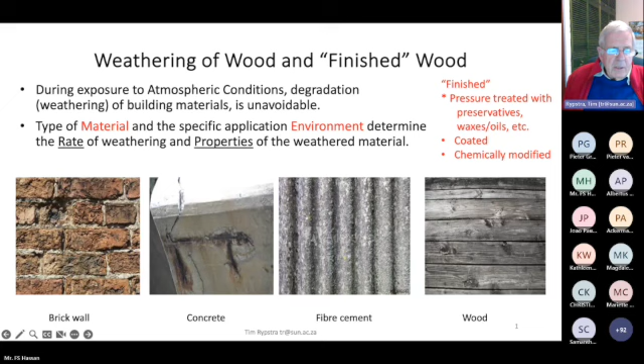Then some examples. Well, we all over centuries know that wood has been used as a construction material in various applications and industries and products, and the function varies extensively. It can be purely structural, right up to purely aesthetic, and anything in between.

And then the question is, under which environments does it happen? There we have the 3 classes of environments. First of all, the atmospheric conditions, which refer to interior applications and exterior, and that's where the weathering, typically the definition of weathering would include that particular environment, then terrestrial or in ground contact, and then aquatic environments, freshwater or marine water.

And the basic question is then, how does finished wood weather? Some of these photos I'm showing here are from South African pine treated with various surface coatings, or some other treatments. They've been exposed at 45 degrees north facing at Stellenbosch. So these are typical weathering phenomena, starting with a piece of untreated, unfinished wood, 1 year more or less under the weather. Deeper checks appear in the heartwood. Further down, the wax-treated wood, in other words wood impregnated with waxes, certain droplets are still remaining behind after 10 years. Penetrating finish, after 2 years, produces an irregular surface texture. It's not to say that every penetrating finish does that. So these are just specific features of weathered wood.

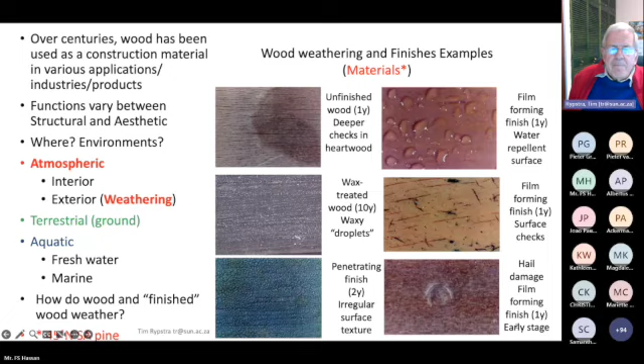Proceeding to a darker accentuated ring, which is indicating some fungal growth there. A little bit later, in another coating, you can see the elliptical pattern is actually discoloration in the wood itself. You'll notice the wood grain doesn't show through these coating systems, because they have certain pigments that prohibit that.

Then flaking and fungal attack on timber. This is a typical film forming coating that peels away or flakes away as a result of the swelling and shrinkage that occurred in that particular part of the sample here.

Just to refer back to the heading at the top, these are the materials we are looking at - wood material being coated or treated, showing certain weathering characteristics.

In this SEM, scanning electron microscope photo, the growth of a mold on top of the surface looks quite rough actually, and normally if you touch it, it would feel very smooth. But this is what can happen depending on the growth conditions for this particular fungus.

A crack in a coating, with spores or mold growth already happening there, finding its way inside the wood. And then on the right hand side, there's a coating system that started flaking, with crow's foot cracks developing, and it disintegrated as a coating.

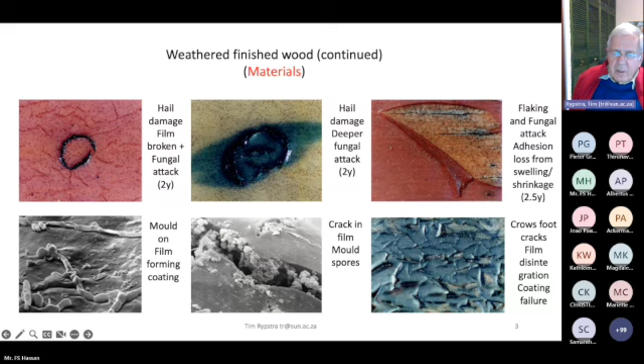Okay, the next slide. If we look at certain products, as soon as you take a material and put it in a product like a door, a window, a gate, or a rail, then you induce certain weathering characteristics in it.

Perhaps it looks bad, but from this you can understand the mechanism of deterioration of certain products. Of course, an insufficiently maintained painted hardwood door - at the top of the white panel, you see these lines which accentuate the joint.

As soon as these become visible, you know there is excessive moisture coming in at that particular point, and also excessive moisture which accumulates at the bottom rail of these fielded panels.

Similarly with the window in the center, at the bottom you will find that the bottom parts of products, because of gravity, are always suffering more than others - water running down, accumulating, especially if there's the possibility of water accumulating at the bottom.

That's where, at the corners, at the joints, you will find water seepage through the coating, and then the whole deterioration - well, it's actually called weathering, but it is part of fungal degradation as well.

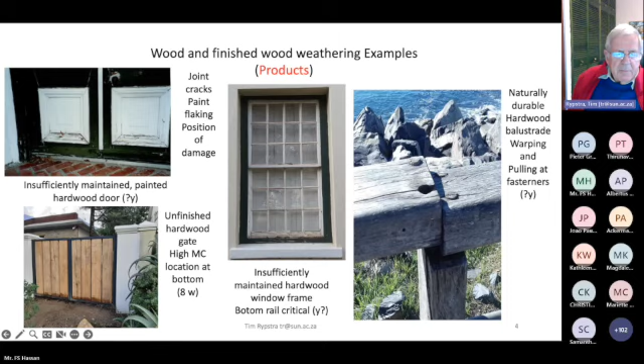Then, not that wood is bad, because that might be the impression - this is a timber deck that was installed for 32 years and CCA treated, H4 level, and it's still in a relatively good condition. Certain pieces of course have to be replaced, but that's the variability of the material, something one has to accept.

The one in the center is another part of that same 32 year old timber deck, where one part was replaced partially, and you can see the difference between the weathered and the slightly weathered wooden decking board, which gives us information about the weathering mechanism. Then another one in the left-hand corner at the bottom, there's a fascia board, and one needs to specify why.

This is actually a very good, excellent piece of study material, although it is not very decorative to put on your roof or keep like that. This is a delaminated and deformed TBTO-lindane treated phenol formaldehyde bonded South African pine fascia board. After 30 years, insufficiently maintained, it shows how delamination occurs as a result of weathering and deformation, with other sections moving out of position.

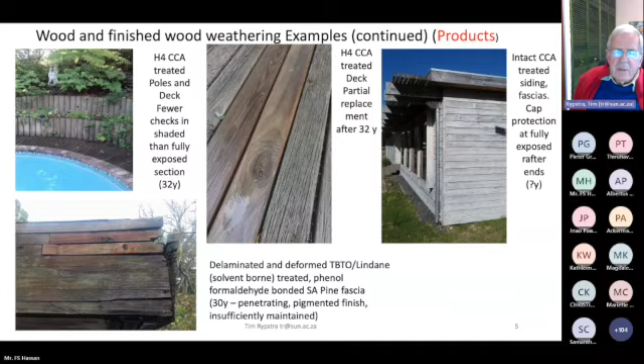A balustrade or a rail on a bridge, naturally durable hardwood. It's been there a couple of years - I couldn't actually determine, but I think it's even more than 10 years. Some cracking already occurs on the flat surfaces at the top, but it's still in very good condition.

It probably needs the maintenance to be improved a little bit more. On the right hand side, a naturally durable hardwood deck board, and we all know that contact with a wet kind of building material like concrete, with wood being in contact with that, has a higher chance of being attacked by fungus because of the increased moisture content levels.

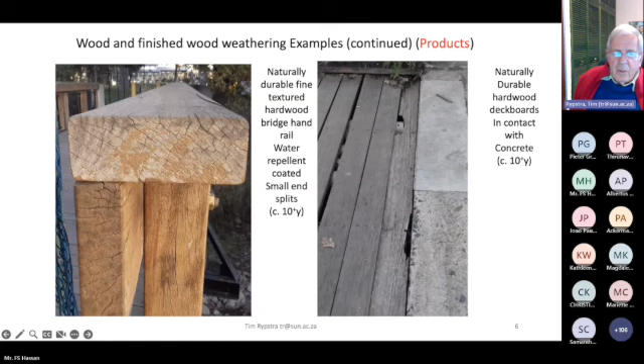So where does it occur? If we have to define it, what is a suitable exterior condition for that? This description, a European use class description, is classified in terms of the moisture content - occasionally more than 20 when it is outside undercover and some wetting can occur, and more frequently above 20 when it's outside above ground with weathering and wetting. The two other terms, limited and prolonged, which are very subjective terms, are included as well.

When does it happen? Does it take 2 months, 3 months, or does it take longer? So how does it weather? In other words, what is in the environment that is causing weathering of woody material or a wooden product? There are quite a few of them.

Insolation, in other words the amount of sunshine received, changes with daily, seasonal, annual variations - what is the day length and what kind of UV levels are present. Then in terms of heat, air and wood temperatures differ - what are the maximum and minimum temperatures. Another important one is the dew point, which will describe when condensation on surfaces can occur.

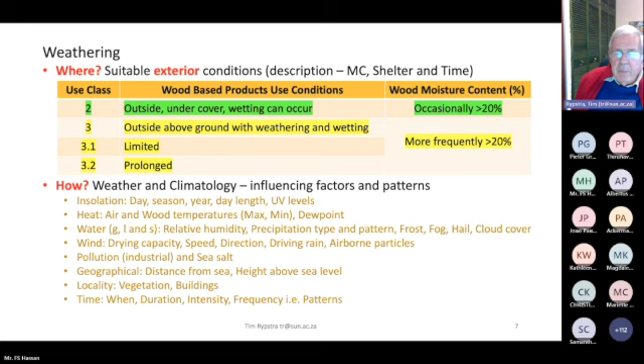Looks a bit confusing, but the background is as follows: these are graphs showing that two samples of wood were subjected to two environments. One was an open environment, subjected to all the elements, sun and water, and the other was kept under cover on the roof. The idea was to find out how the moisture contents and temperatures of these two pieces varied with time, selected on a clear summer day, the 21st of December.

That's when the maximum insolation was present. Luckily, in that same year, 1986, on the 20th of December, we also had a rainy day in Stellenbosch, and here you can see that the insolation pattern is quite erratic.

Then the opposite, the shortest day of the year in winter, 21st of June, and we also had a rainy day, typically in Stellenbosch, in the Mediterranean climate we have here.

Here you can see that the curves indicate, the red one indicates the temperature variation. So at sunrise, say at 6 o'clock on the clear summer day, 21st of December, that's when the temperature starts picking up and goes quite high, actually higher than the temperature found inside the timber with roof protection above it.

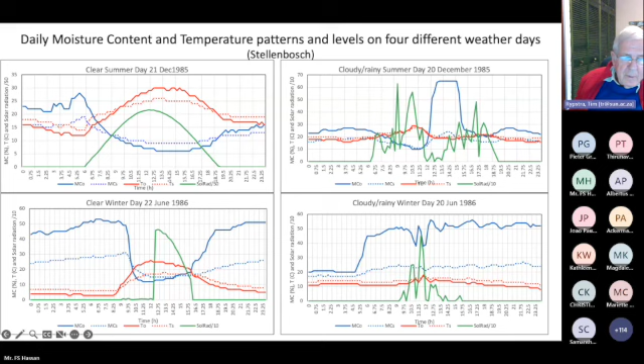Next slide, please. So doing some statistics on it, taking out the maximum moisture content outside - that's a printing mistake - is usually higher than the fiber saturation point. In other words, the max 65, 28, 56, 53, that's typical for wood fully exposed during these conditions, even when it wasn't raining, still quite high above, say, 30%, which is the fiber saturation point.

Similarly with the sheltered condition, everything is more or less below fiber saturation point, except for the relatively high 31% on the clear winter day.

One could also say the minimum moisture contents on the rainy day, as one would expect, are higher than on a clear day, and the minimums for the sheltered one vary between 6 and less than 20. So with this, we can get an idea of what levels these moisture contents are changing on a daily basis.

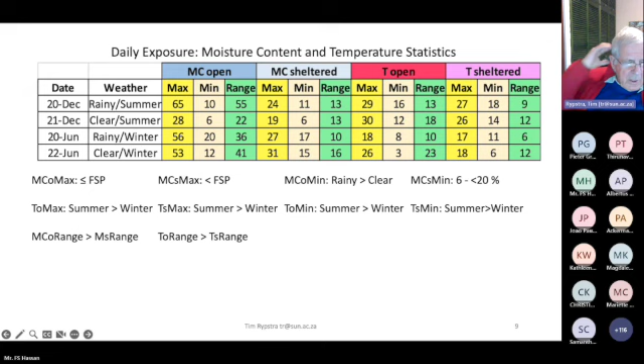So what are the effects of weathering? Discoloration is the first thing that is visible, and it starts with staining because of extractives and fasteners. It is followed by bleaching and yellowing, depending on what kind of species we are dealing with.

It's followed by grain raising, which is surface roughening, and deformation, which can include bending, warping, twisting, cupping, and that already generates forces which are pulling at the fasteners. Then in a more advanced stage, you can get checking at the surface, and if it's really bad, splitting at the end grain.

So these phenomena are associated with weathering, and if this carries on, there's softening, darkening, white spots are formed, and across and along grain cracking, which is typically associated with fungal attack, which sets in when moisture content levels are normally above 20%.

To explain that, we have to do a little bit of wood science, and it might be boring, but you can just read over it or be made aware of it. To a chemist, it's quite interesting to look at what happens there.

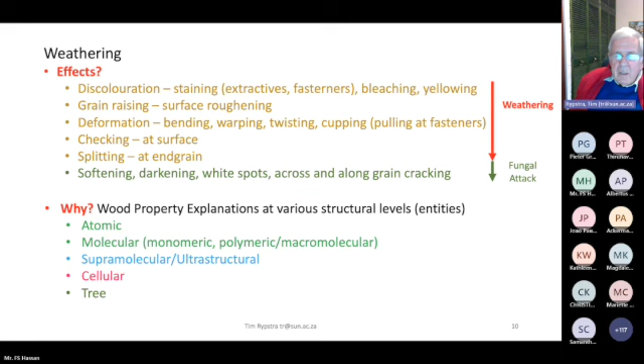So at the atomic level, the composition is important. We are dealing with a carbohydrate compound which contains carbon, oxygen, hydrogen, and some other elements as well. These are put together in monomers, which are used to make the natural polymers. The monomers are the hexoses, which contain 6 carbons, pentoses with 5, used up in the polysaccharide polymer, and phenylpropanes with 9 carbons, used for lignin.

And then there are some others which do contribute to the characteristics. These polymers end up as 40 to 45% cellulose, 20 to 30% polyoses or hemicelluloses, and lignin, and they are all bonded together with certain bonds.

We are interested in the number of hydroxyl groups, or the water bonding sites potentially available for sorption. In lignin, the one component, there is 1 site. In cellulose, there are 3 per monomeric unit, and 3 for the 6-membered and 2 for the 5-membered units that make up the wood. So the hydroxyl groups are mainly responsible for the hygroscopic characteristics of wood.

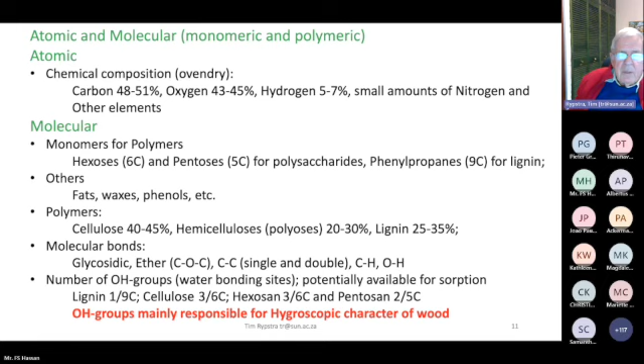Okay, next slide please, and this we can just glance at. Here you find the hydroxyl groups in cellulose. This is oxygen, by the way, so you can think what water, which is also a small molecule, where it will fit in - it's still smaller than the hexoses that we have here. It's a linear molecule, homopolymeric, high molecular material, and it has 3 hydroxyl groups per 6 carbons, and it has the ability to form crystals in wood.

Going to the other polysaccharides, there are also hydroxyl groups - I only indicated the 2 - and the other main chemical component, which in this case is a hardwood lignin, has 3 hydroxyl groups for every 9 carbon rest. This is a typical 9 carbon rest with a ring structure with a side chain. Lignin is 3-dimensional and heteropolymeric, meaning it has different building units, and the same with the hemicelluloses - they also have different building units.

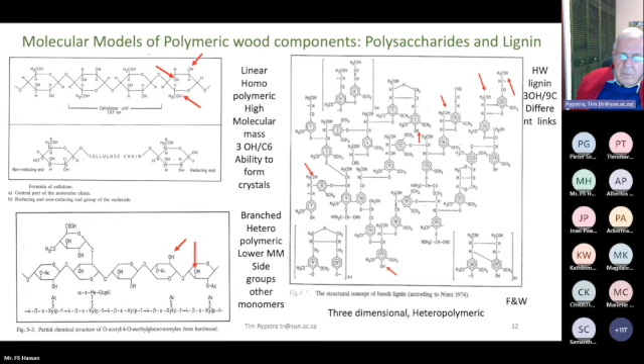Okay, the next slide. At the supramolecular or ultrastructural level, there we have what we call an anisotropic arrangement or packaging of polymers into the cell wall. These are just models that illustrate that. Here, for example, at the bottom in that little block, there are 42 cellulose chains which are all grouped together.

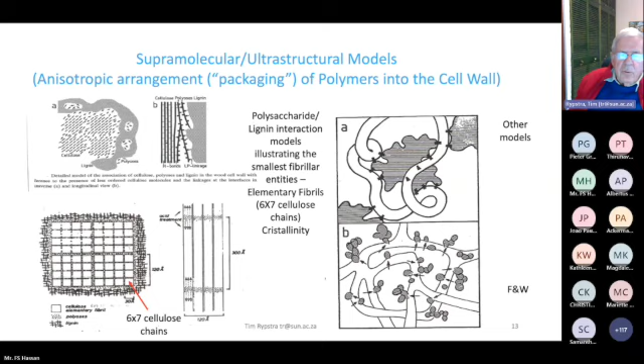And this now is assembled together, taking the next slide, into structures such as the cell wall, with cell wall layers that differ chemically, differ in their fibril orientation, and also at the connections between the cells you will find different chemical compositions. If you're really interested to know how cellulose, hemicellulose, and lignin are distributed in a cell wall, this is giving you a picture of that, showing that the primary cell wall is actually quite high in lignin, whereas the secondary cell wall has quite a high amount of cellulose. Okay, next one.

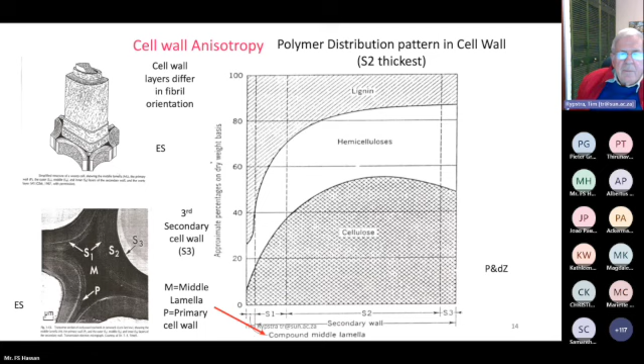In other words, there's no homogeneous pattern that is followed. There's a difference between the radial direction, the tangential direction, and the longitudinal direction in the material.

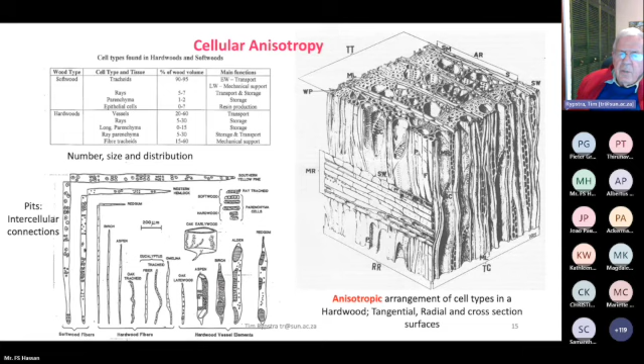In the tree itself, when boards are sawn from logs, distinct sections such as sapwood, heartwood, juvenile wood, mature wood, as well as anatomical surfaces are produced. And in the sketch on the left, you see what a tangential surface looks like, a little bit higher up what a radial surface looks like, and in the center what a transverse surface looks like. Reason why this needs to be mentioned is because these are the surfaces that are going to be exposed to weather conditions, and the behavior is different for the different main anatomical directions.

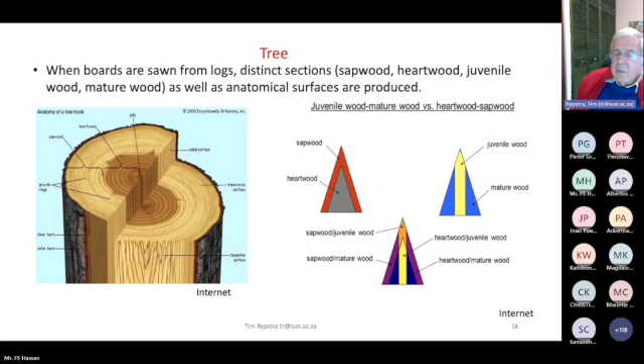Then we've got something else as well: juvenile wood and mature wood, which is immature wood, and heartwood and sapwood are also entities in the tree that are present. And when we start sawing the tree, we will see different amounts of these wood components, juvenile wood or heartwood, differ as it is illustrated in this sketch.

Hygroscopicity is the main feature leading to the changes that occur during weathering. And in these two sketches on the left, or graphs, we see how the ability for water to be absorbed to wood material is dependent on, first of all, the relative humidity. In other words, where we are when we keep wood under shelter and the relative humidity changes, say, from 30 to 80%, and at the same time, when the temperature changes, how that affects the moisture content of the wood.

And in red here, example 1, if it's 80% relative humidity and 25 degrees centigrade, then the moisture content of that piece of wood is 16%. And example 2, which is much drier and a higher temperature, is 5.6%. So when wood is going from one condition, say the red one to the blue one, there will be shrinkage occurring. And the magnitude of that difference will actually give us an indication of the weathering potential of that kind of environment in which these changes occur.

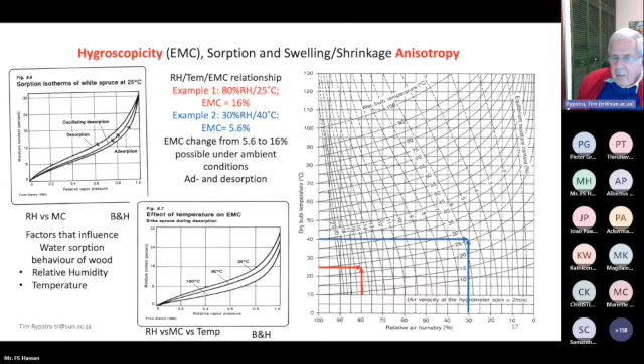So this next diagram on the right-hand side shows us how these moisture content and relative humidity change when there are conditions under those.

Together with hygroscopicity or with moisture content changes, there is swelling, which is leading, as you would see on the right-hand side, if you take a cross-section of a tree like that, and you take a perfectly square piece of wood, then depending on where you cut that from the tree, you will find that the dimensional changes that occur with time are different. So this perfectly square one now has this cross-section shape, whereas after drying, this one is less deformed or less shrunk in that direction as it is in the tangential direction.

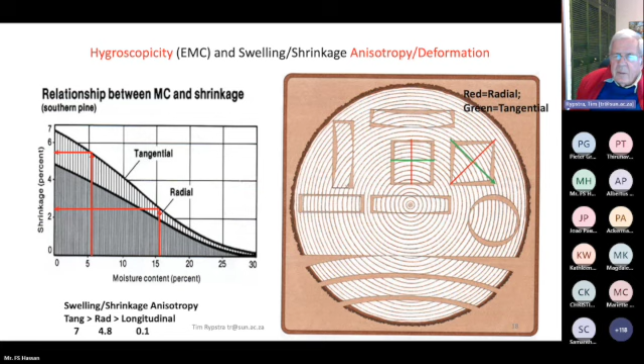So the weathering mechanism during discoloration and photodegradation of exposed surface of wood, because that's what typically it starts off, the anisotropic swelling and shrinkage associated with weathering, which are then as a result of continuous changes in moisture and temperature, are together with other associated wood properties and environmental conditions responsible for the deformation of wood and then the development of checks and splits. And this opening up of the internal surfaces increases the accessibility to sorption sites deeper into the wood, leading again to high moisture contents, at which more serious damage by fungi. And that's typically plus 20% moisture content where that can happen.

So here you can see a swollen, cupped, relatively unweathered piece of wood. Water is standing there, but in this particular case, where it is about 30 years old, water just disappears into it and promoting further degradation.

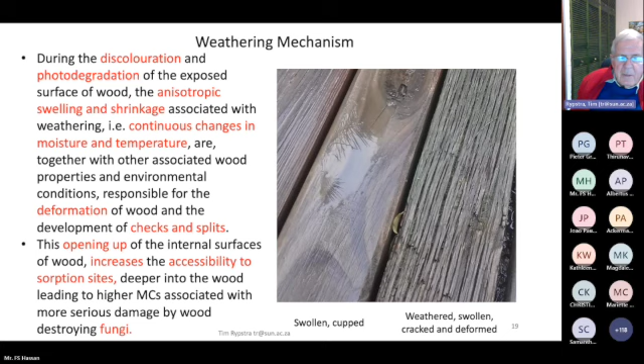Weathering protection techniques: the application of surface coatings is one, as you see on the right-hand side with a brush, or pressure impregnation of wood with suitable chemical compounds such as waxes, oils, prepolymers, and they can retard, or somehow a better word is control, the uptake of water. And then there's chemical wood modification that reduces the hygroscopicity of wood, that will help to reduce the amount of dimensional changes that occur. And that will then also make wood last longer.

Now, in sorption rate and extent studies, this can be evaluated in the laboratory.

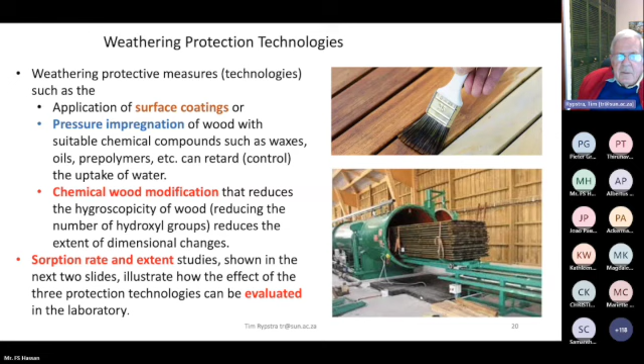As a piece of equipment that can be used under, say, a dry, warm 45 degrees, 30% moisture content of 5.5, and then when all of a sudden the piece of wood is subjected from that environment to another, the dimensional change of that product can be measured, whether it's a natural piece of wood, wood that has been treated, chemically modified, or even coated, because the coatings have some retarding effect on moisture pickup, and also a retarding effect when moisture leaves the wood.

Okay, next slide, please.

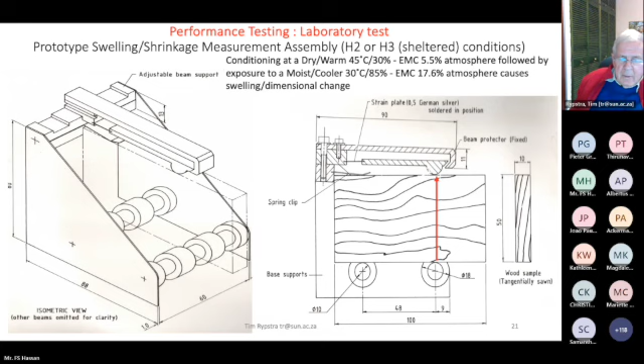So treatments to reduce the rate and extent of dimensional response and to reduce checking and splitting are first of all surface treatment, in other words giving it a coating. If this is the blue line representing a piece of wood subjected to dimensional change, whether wetting or drying conditions, surface treatment does not change the extent to which it will go, it will just change the rate at which it happens.

Whereas modification of wood, chemical modification, will actually reduce the levels of shrinkage that it can reach. So it's now just a matter of trying to find out what is acceptable for a certain environment.

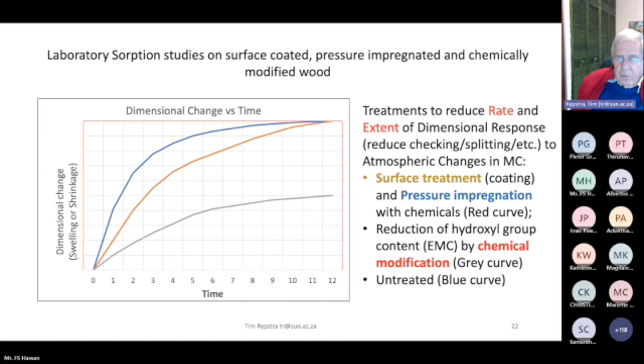Okay, next slide, please.

So performance testing is another thing that can be done in addition to laboratory testing, as you saw on the previous slide. Water vapor permeability and liquid water permeability are measurements that can help to find out whether the amount of weathering can be reduced and the effect of that.

That's a typical study which is done on materials, and you can see here that natural exposure of wooden pieces without any structure, as you will see on the right at the top, there are window panes which weather differently than if you are looking at 45-degree or horizontal samples which don't have any processing other than planing and the application of certain coatings or changes to the structure.

But to realistically consider the impact of all 4 seasons, a minimum of 12 months exposure is required to generate useful results. What you see on the right-hand side there is typically not a result of rain, but a result of dew. So atmospheric conditions generating dew are quite important, because they are not represented in rainfall figures if one wants to correlate rainfall with the durability or weatherability of coatings.

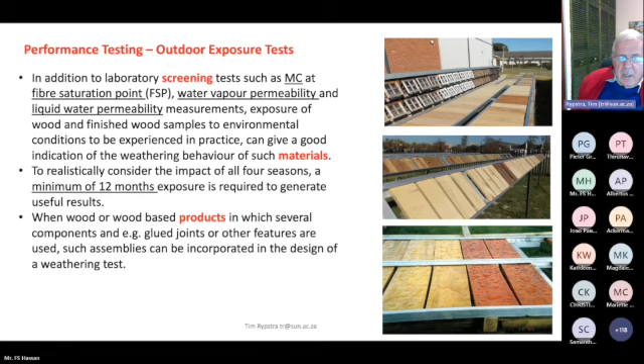Okay, the next slide.

So in conclusion, various properties can affect the weathering performance of wood, which is not very helpful and quite a challenge, but we know that species has an effect. The amount of early or late wood, in other words the growth rate of wood, certain wood with certain growth rates weathers better than others. The presence of sapwood and heartwood - sapwood is regarded as non-durable, and if moisture content levels remain high in sapwood, then you can get discoloration and later on more serious fungal attack.

Juvenile or mature wood has a strength implication at least. Reaction wood - all these tests are normally run on normal wood, but in reaction wood your density and permeability is affected. We normally work without knots when we do certain tests, because the introduction of knots just makes things more difficult. The size, number and distribution of knots in woody material being exposed has an effect on its weatherability, and then grain deviations, spirality and deformation. These are typically growth-related influences that one tries to eliminate when busy with certain testing.

And then with wood material, dimensions and shape of wood - a flat piece versus a square cross section - density is very important, moisture content, surface quality, whether it's sawn, planed or sanded, the treatment, whether it's been preserved or treated with physical or chemical treatments, sawing pattern, whether it's radial or tangential, orientation and position.

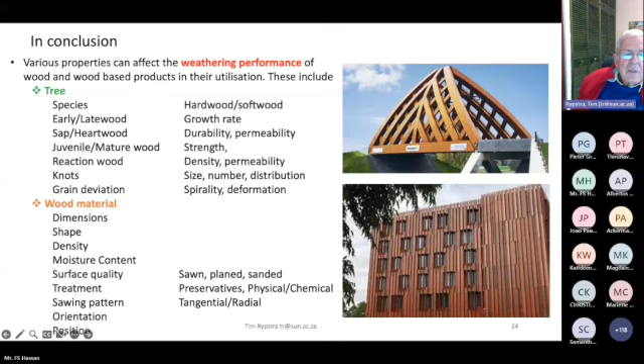And then in conclusion: under H3, above ground conditions, we use wood at moisture contents which can be critical, and dimensional changes range in moisture content levels from 0 to 30. Fungal attack will start at levels larger than 20% moisture content. So this is what we have to deal with when wood is exposed above ground.

And then with proper design, specs, construction methods and techniques, and regular maintenance, which includes repair and replacement, the advantages of building with wood should be exploited. For example, wood is relatively easy to work with, and it has a favorable mass to volume ratio.

Most importantly, it's renewable, has low energy production costs, and can be disposed of in an environmentally friendly way. All other construction materials are subject to degradation, be it weathering. So everybody involved is asked to use wood with knowledge and care.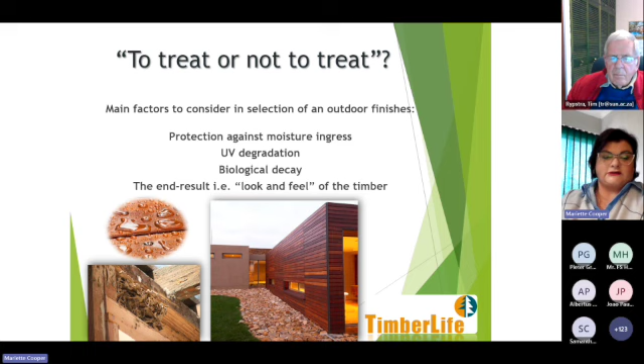So let's start with the first question: what is the purpose of an outdoor wood finish? We summarize this in three basic functions. First, it needs to protect timber against natural weathering by controlling moisture fluctuations in the wood and reducing UV degradation on the wood surface.

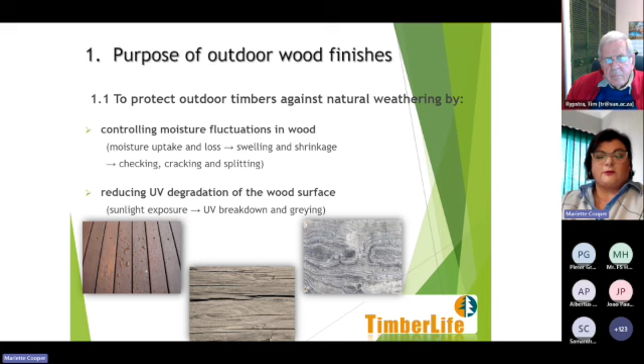Controlling moisture fluctuation means controlling the moisture uptake that occurs when wood is exposed to rain or other forms of free water, and the subsequent moisture loss when exposed to dry conditions. Excessive swelling and shrinkage cause movement, and if not controlled, this can cause timber to check, crack, and split. Reducing UV degradation addresses what occurs when timber is exposed to sunlight—if not controlled, UV breakdown and graying and aging of the timber will occur faster than if it was sufficiently protected.

The second function is to protect the timber—specifically untreated, non-durable timbers—against biological degradation, meaning it has to protect against insect or termite attack, and also protect against wood discoloring fungi and surface mold growth.

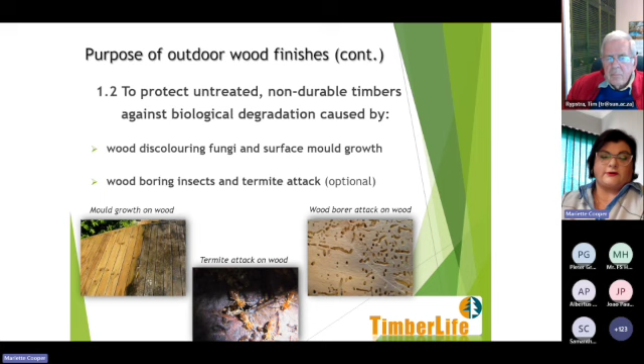The third function is to improve the appearance and natural beauty of outdoor timbers—enhancing the wood grain and color, and providing a pleasing decorative finish, giving you the option of a matte, sheen, or gloss look, with or without final color pigments.

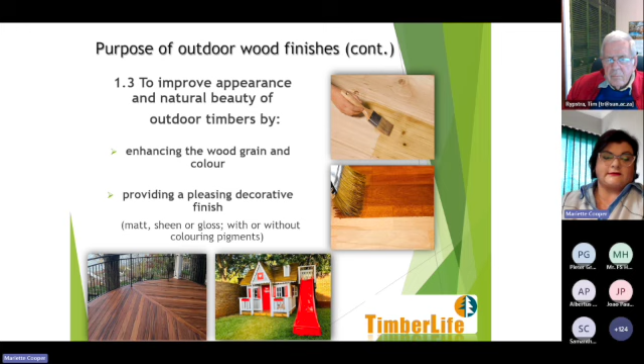Now, getting back to the criteria for selecting an outdoor wood finish, these can be summarized as follows. First, consider what type of timber needs to be finished—will it be a hardwood or a softwood? That means the difference between a natural dense timber species, like your hardwoods such as Rhodesian teak, versus softer, more susceptible timbers like pine and saligna.

Also consider whether the timber you'll be finishing is porous or non-porous—in other words, how readily the product will be absorbed into the timber, or how the finish will adhere to the timber surface.

When talking about outdoor conditions the timber will be exposed to, consider whether it will be in dry or more humid climatic conditions. This directly affects whether the timber will tend toward higher moisture uptake or subsequent moisture loss. Also consider whether the timber will be fully exposed to sun and rain, or protected or partially protected—for example, a fully exposed exterior timber versus a door that can be partially protected by a veranda or overhanging roof.

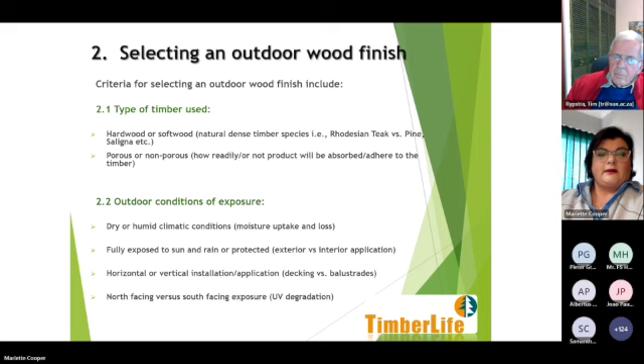Moving on to the type of protection, performance, and durability required. The timber needs protection mainly against outdoor weathering conditions. For exposed window doors or window frames, will it need to be protected mainly against mechanical wear? If you talk about a protected, undercovered wooden deck, it's very susceptible to foot trafficking. Or do you need the timber protected in a combination of both, where you've got a fully exposed wooden deck but also subjected to full mechanical wear?

Also take into consideration that the timber needs to be protected against biological attack, in the case of untreated, non-durable timbers that are susceptible to insect and fungal attacks.

Referring to the final aesthetic appearance of the timber, would you prefer the final appearance to have a matte, sheen, or gloss finish? Again, with the option of having wood with or without wood coloring pigments.

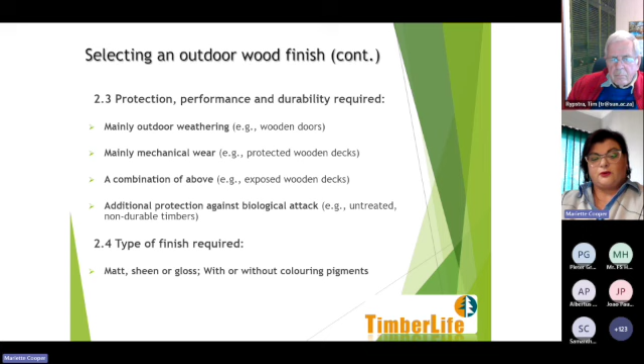Also take into consideration the ease of application. Can the product be applied by simple brush-on, roll-on, or spray methods, or will it require more technical, complicated techniques? Referring to ease of maintenance, will reapplication be done by simply cleaning the wood surface before recoating, or does it require labor-intensive, complete stripping of the old coating before reapplication?

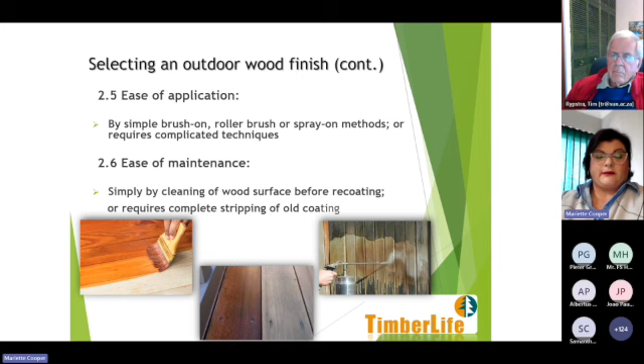Then the drying time. Is drying time an issue? Quick-drying surface coatings are not always the best solution for your specific timber application. And also the cost. Is cost an issue? Bear in mind what you're basically expecting from your outdoor finish versus the final cost of the product.

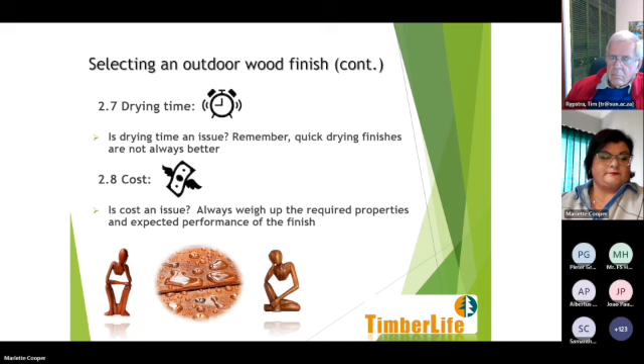Considering the question and using our guideline, what types of outdoor wood finishes are available? Broadly speaking, we've got three types of wood finishes available. The first, which a lot of people know, is your traditional film-forming wood finishes, or your traditional solvent-based paints and varnishes.

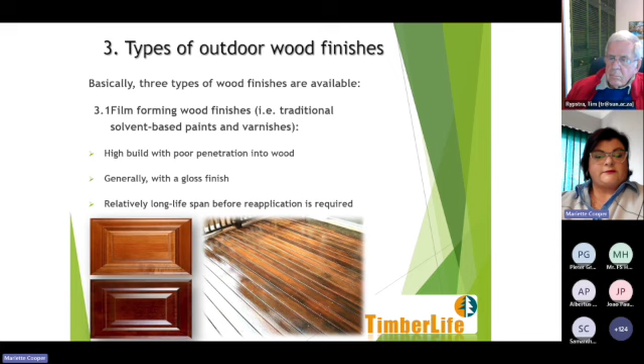These type of finishes tend to give you a high build finish with very poor or little penetration into the wood surface. It will typically have a gloss finish depending on the product itself, ranging from medium to even high gloss, and a relatively long lifespan before reapplication is required.

Moving on to the second type, which is your penetrating wood finishes. These are typically your water-repellent, solvent-based wood sealers. These products will normally be low build with good to very good penetration into the wood surface. They provide a natural matte finish, but have a relatively short lifespan before reapplication is necessary.

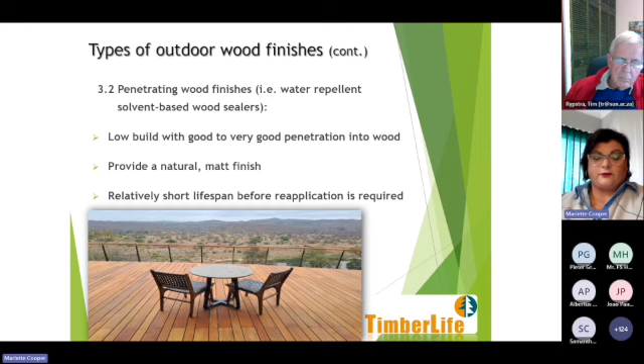Then the last one is the hybrid wood finishes, where you get the benefit of having the best of both worlds. You've got a penetrating wood sealer, but it also gives you a bit of sheen or a building finish on the wood surface. Normally this will have a medium to high build finish, but with good penetration of the product into the wood. It typically has a sheen to semi-gloss finish and a medium lifespan before reapplication is required.

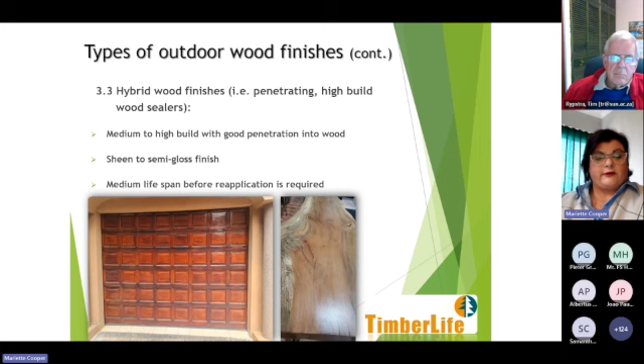Then we refer to the suitability and performance of the different outdoor finishes in terms of their behavior, and they do tend to behave quite differently in terms of suitability of application, effective lifespan, deterioration when exposed outdoors, and ease of maintenance. For example, film-forming varnishes or wood finishes are mainly used for vertical applications.

So think of your typical wooden doors and window frames - they can last up to 3 years if it's a good quality varnish, and up to 5 years for good quality paints. But they will tend to flake and peel once reaching the end of their lifespan.

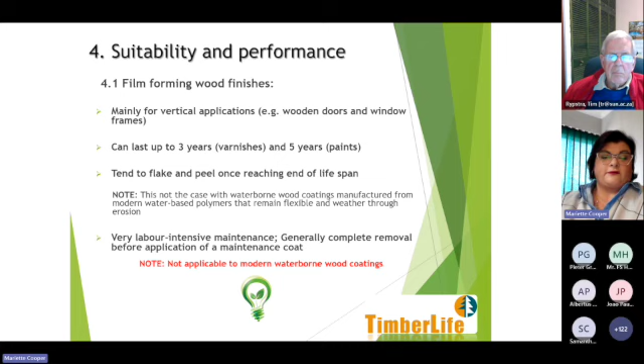But it's worth noting that with modern technology and new developments, this is not the case with the new waterborne wood coatings, which are manufactured from modern water-based polymers and remain flexible, weathering through erosion. These film-forming wood finishes are, however, very labor intensive when you need to do maintenance, because it generally means you have to completely remove the coating before reapplication of the next layer.

Continuing on suitability and performance, when we talk about penetrating wood finishes, we also normally refer to these as wood oils. They're used typically for vertical or horizontal applications, such as wood cladding and decks, where a more natural finish is required, or a low gloss finish like a sealed oil deck. These finishes can last between 6 months on decking surfaces, but 12 to 18 months on vertical or covered applications, depending on exposure. The product weathers through erosion, so you'll have no flaking or peeling. Maintenance is fairly easy since you simply wipe off the wood surface before applying a maintenance coat.

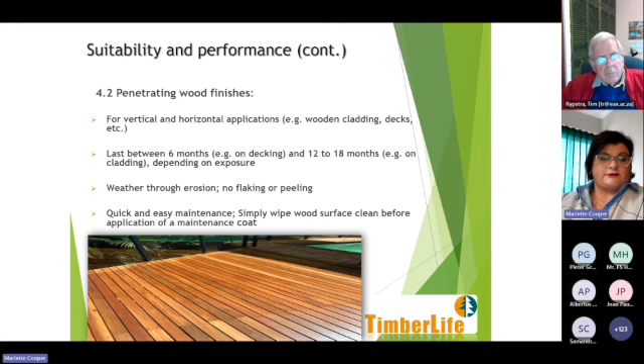Then talking about the new hybrid wood finishes - these are quite versatile and can be used for vertical or horizontal applications such as wood cladding, doors, window frames, and wooden decks. These last quite long, depending on exposure and, very importantly, application method, as it can be applied for horizontal or vertical applications, whether fully exposed, partially, or fully protected. Again, these finishes don't flake or peel - they weather through erosion, and maintenance is relatively easy, requiring only light brushing or cleaning of the surface before reapplying a maintenance coat.

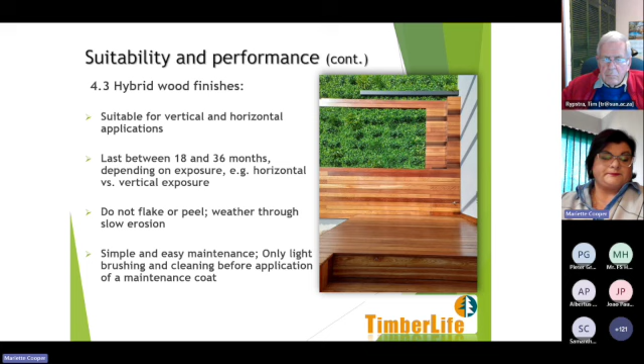Moving forward - how can the performance and durability of outdoor wood finishes improve your timber investment? In our view, it can be improved by adding one of two things: transparent iron oxides, and UV absorbers or light stabilizers. Transparent iron oxides, when added to wood finishes, provide added protection on the wood surface where UV degradation takes place, by absorbing the harmful rays of sunlight. UV absorbers and light stabilizers are designed and formulated to provide excellent protection, not only to the wood surface but also to the product itself against UV degradation caused by sunlight exposure.

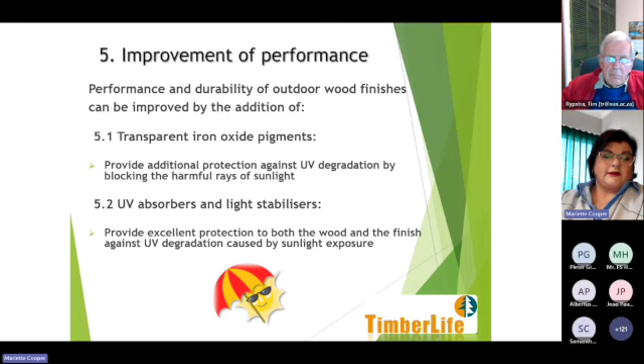So very briefly, that is my presentation.

Just lastly, when we talk about the new buzzword, we need to compare two products - water-based and solvent-based - according to their properties. With reference to VOC content, water-based varnishes tend to have nil to very low content, whereas solvent-based finishes are high to very high. With reference to odor, water-based finishes is virtually nil, compared to solvent-based finishes, which is normally medium to strong.

Flammability: water-based finishes is nil, solvent-based finishes high. With reference to drying time, water-based finishes are relatively quick drying, being touch dry on the wood surface within about 30 minutes, while solvent-based finishes can take up to 24 hours, for example with high-build varnishes, to dry and cure properly on the wood surface. If you talk about application of the clear product, the wood color change with water-based finishes will be none - it's completely transparent and clear on the wood surface - where solvent-based finishes, depending on the components, which normally include an oil component, will tend to have a slightly yellowing or medium color effect change on the timber. If you talk about penetration into the wood surface, water-based finishes have limited penetration.

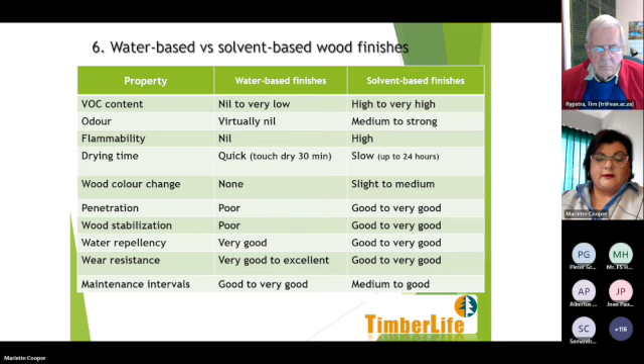For example, on an exposed deck coated with a natural matte sealer, versus a good hybrid water repellent finish - a solvent-based one, for example, on a window or garage door - that will require less frequent maintenance. And that concludes my presentation. Thank you.

Thank you, Mariëtte. I just want to go back to some questions - there was one for you, Tim. Just trying to find it... here we go. It's from Ken Lever, and he's asked: have you carried out extensive testing on indigenous wood, and if so, where would he find information on - I think he meant acacia. Is that something you could advise on? You're on mute, Tim, so just want to unmute yourself there.

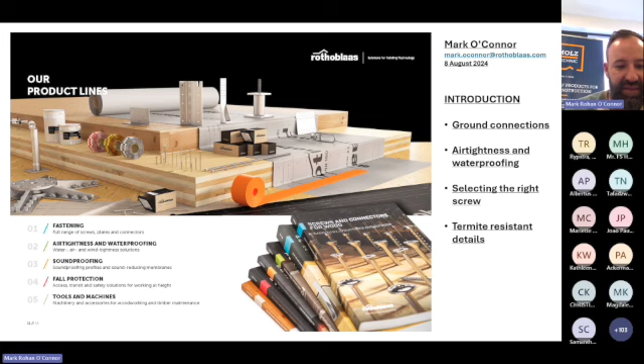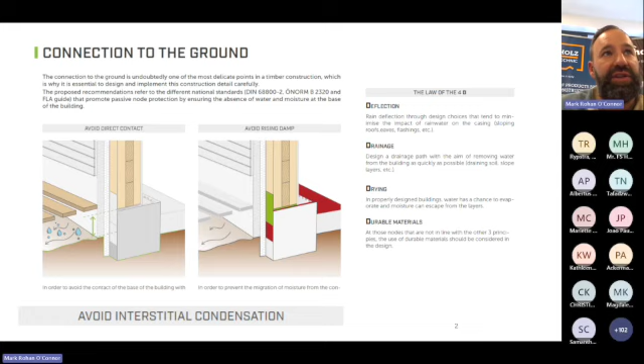So the first and most important thing, one of the most universal problems or challenges when it comes to timber elements, is connecting it to the ground. We always believe in the law of the 4 Ds in terms of design: deflecting moisture, drainage, drying, and using durable materials, as well as avoiding interstitial condensation. This is condensation which happens inside your timber element, whether it's cross-laminated timber or timber frame buildings.

So there's just a detail there of where your timber element is raised off your concrete, raised above the ground, and the green and the red that you'll see there are waterproofing systems installed to stop capillary action from the concrete entering the underside of the timber element.

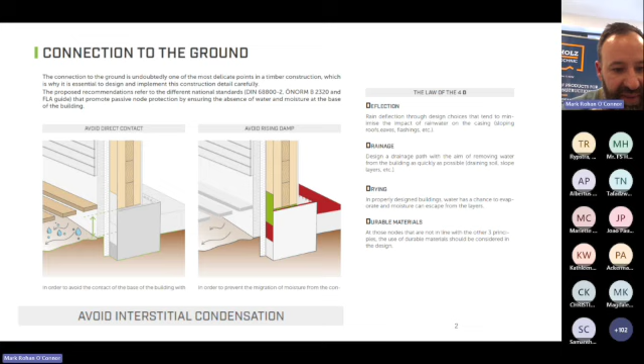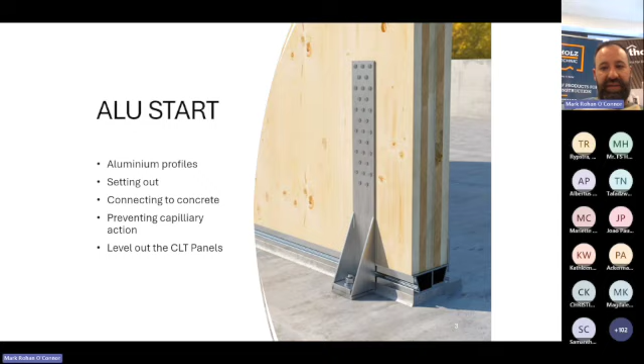Some other ways of elevating or lifting your timber element off concrete in a mass timber or heavy timber frame structure would be a product like AluStart. These are aluminium profiles which can aid in the setting out and connecting your timber element to your concrete. It prevents capillary action, as I said, and it also levels out your CLT panels. Obviously, with CLT and prefabricated timber elements being very precise, and concrete sometimes being less so, it's very important to start off on a very accurate substrate to achieve a solid construction.

Other ways of doing this, these are new products from our side, where you will be using a system called an uplift, which is essentially an angle bracket on a footing. This allows you to basically start your construction on a prefabricated steel bracket and allow you to do your concrete ring beam at the same time as your structure is going up. So it takes away some of the need for accuracy in your concrete work. It also stops or prevents and limits that you don't need to start building after 28 days for your concrete strength—you can do this side by side.

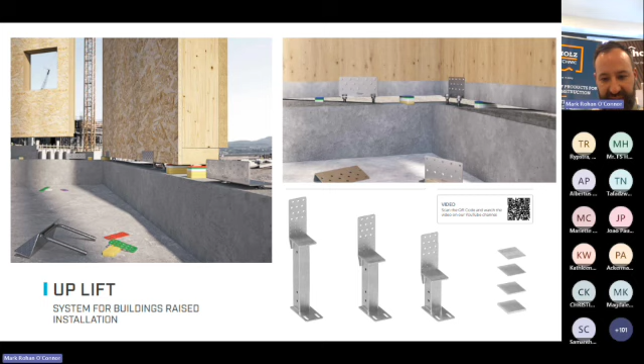So in the renderings you see here, this is a sort of heavy timber frame. On the right-hand side, you'll see they've incorporated a waterproofing element. In the next slide, you'll see how it could be done with cross-laminated timber, so that your structure can arrive on site and go up even quicker, considering the time of wet works.

On a more elementary basis, we could look at supplying products like post bases. These come with engineered values, so you know exactly what sort of resistance you have from a hold down force. They also come in a variety of different materials for different sized timbers, different applications, from stainless steel, galvanized steel, coated steel, etc.

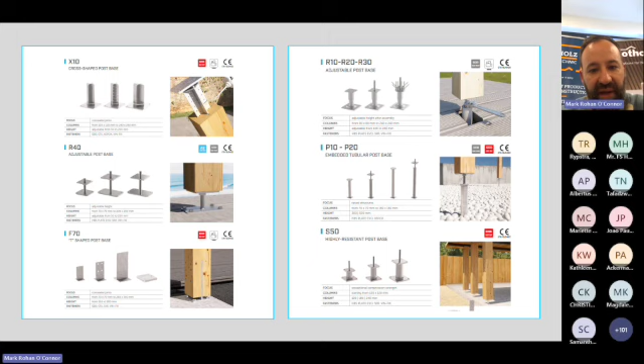Of course, airtightness and waterproofing are a very obvious and crucial part of protecting timber elements. This is something we can really go in depth on, but generally, what you want to achieve with these types of products is sealing of air gaps, sealing of water gaps, and allowing any entrapped moisture within your timber structure to naturally move out of that wall or roof makeup and naturally ventilate so the atmosphere balances inside the timber element.

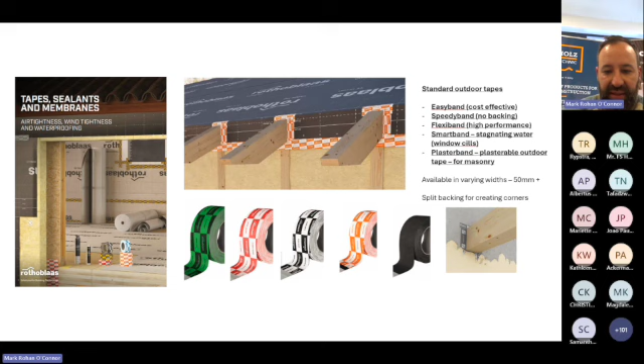Something in terms of selecting the correct fastener for your timber element is really crucial. According to our studies, there's three main things which affect corrosion in a steel element: your atmospheric condition, meaning the location of the screw or steel element, whether it's industrial, coastal, inland, or rural; your service class, meaning whether the timber will be inside, outside, exposed, or in salt water; and the pH level and moisture content of the timber, because the timber can actually attack the screw, meaning over time the pH level and water create a relatively weak acid which eats away at the screw itself.

And why is this important? Well, for the short term, you're going to have a screw connection that looks ugly and will leave black marks on your structure. Long term, you will possibly get a screw failure or a steel connection failure.

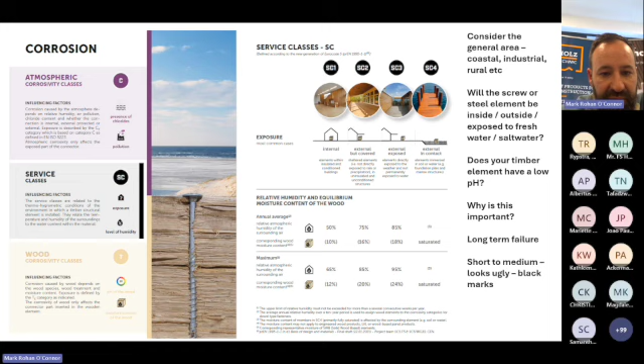In stainless steel, it's actually completely different. Your more corrosion resistant materials are structurally weaker, and your lower corrosion resistant materials are structurally stronger, so it's a compromise. When using stainless steel, you have a compromise between strength and durability, but with the products we've developed, we can move away from this compromise and always know we have a baseline of strength.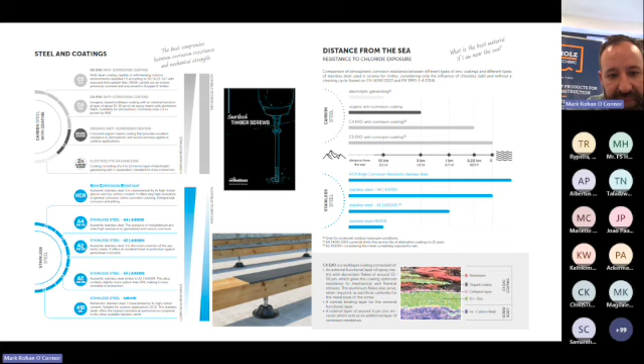We've also compared these Evo coatings to stainless steel to see how they perform close to the coast, and we actually find the Evo coating outperforms A2 stainless steel close to the coast, which is very uncommon to see in that kind of research, but we've managed to discover that this is really relevant and very interesting to our markets. All of this information is available in our smart book for timber screws.

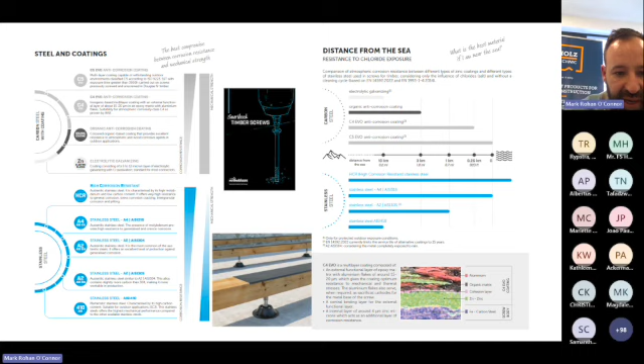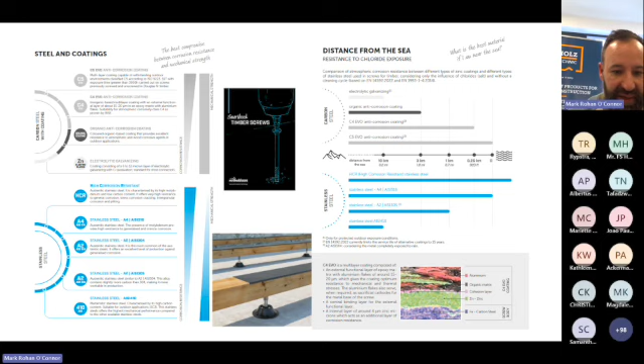Another thing to consider anecdotally on decking structures: we've found in the market that a lot of times when people are stripping their deck, it's the substructure which is failing and not so much the actual decking. A very simple way to address that is to put a protective layer on your substructure, as shown in this bottom center picture, basically a decking tape to extend the lifespan of your substructure. Just something to keep in mind.

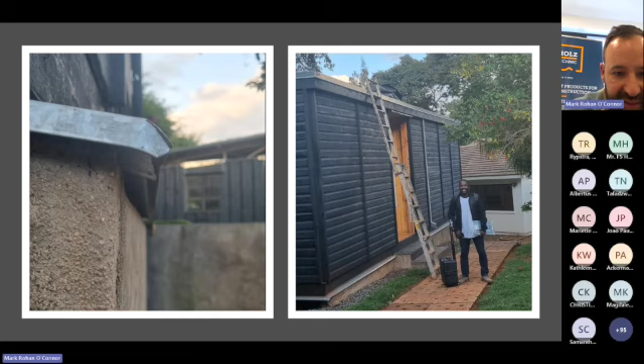Something a little closer to home, well, not that close, but very traditional ways of looking at termite resistance. This is a company in Nairobi. On the right-hand side is your shou sugi ban, a Japanese scorched timber cladding which protects the timber. On the left-hand side you'll see a steel detail underneath the CLT structure. This is a termite resisting detail, since termites can't climb upside down, a very simple way to stop crawling termites from reaching the timber structure. Obviously this doesn't solve flying termites.

Another way of dealing with termites is off-the-shelf products, something like a Termifloor, which you could roll out before your timber structure goes up. Yeah, so that's my bit.